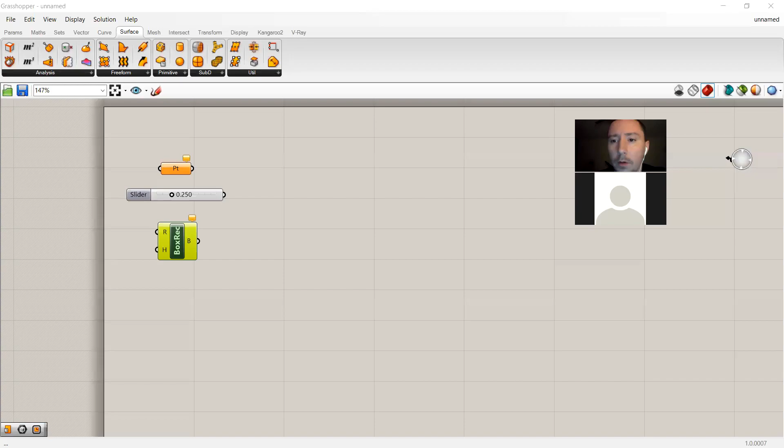Different nodes, so these are called nodes, right? This node in reality is a tiny block of code that's hidden behind a visual interface that does something.

When you first load nodes that require some level of input, they will pop up in an orangey color with a little notice above it, basically saying, hey, this isn't collecting any data right now, meaning it's not working. It's a warning. It requires a bit of data in order to function.

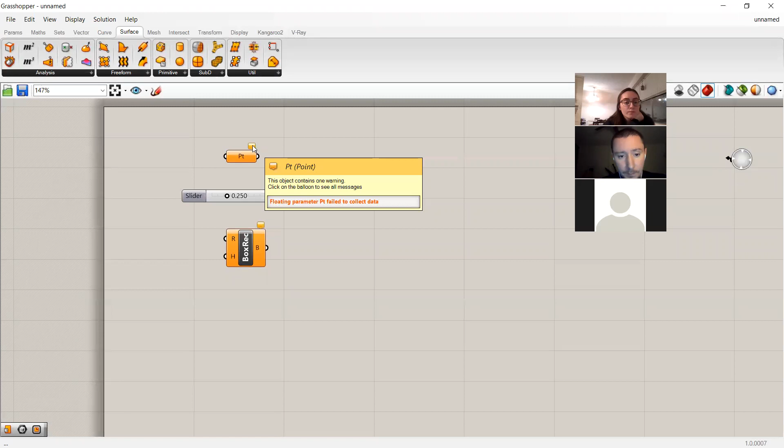If this is red, that means you have an input, but it is not functioning properly. Something is broken, and if you hover over the little message box, it'll usually give you a brief explanation of what's going wrong in your definition.

So these are called nodes. This is kind of a geometry node, right? So this is a point. There's all kinds of them - there's curves, there's planes, there's arcs.

So these are all geometry parameters. This kind of node can have an input and an output. It can also not - we'll see here shortly - it can also just have an output, meaning that you don't need to input something in here. There's other ways that you can get information into this node.

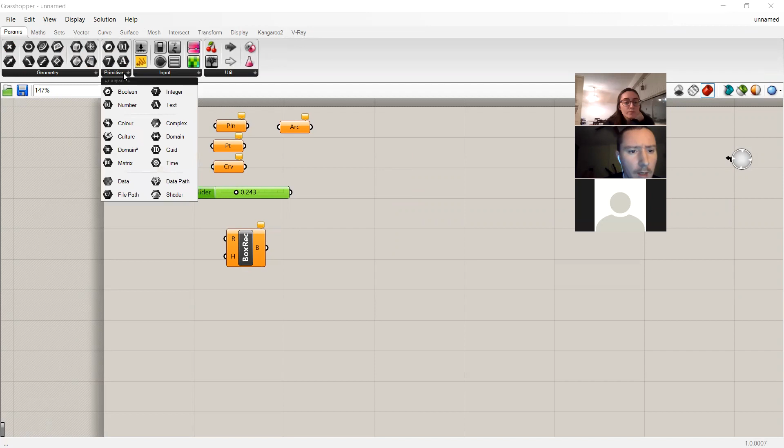This here is called a slider - it's a number slider. It comes from... actually, let me find where the number slider is - oh, there it is, from the input. So these are different input nodes, and some of these over here are also input nodes. Like this is technically an input node.

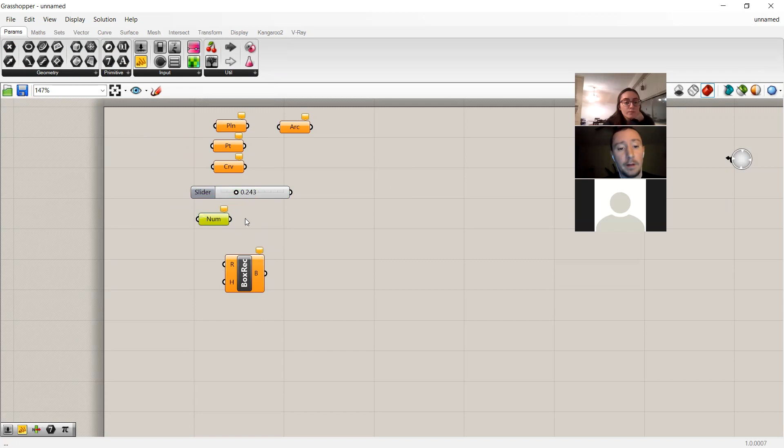These basically force data into something, right? It takes a number and puts it in, gets the number. Or this one is generating a number based on a slider that I slide back and forth.

Some of these nodes you can double click inside of, like the number slider, which is probably the most common input node that you'll use. You can double click inside of them and change how the numbers function.

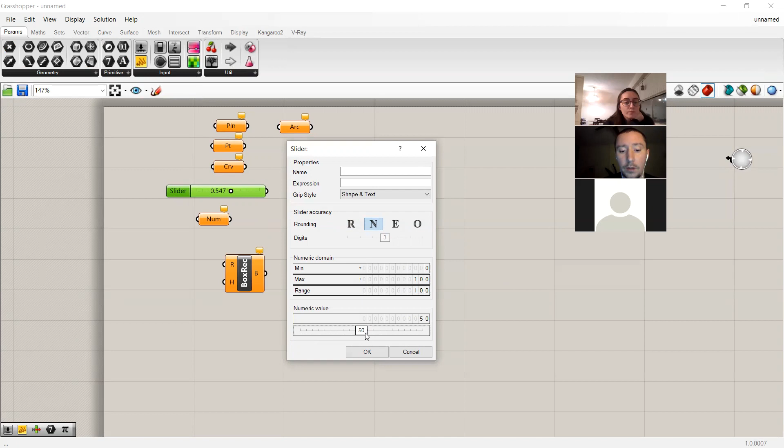For this slider right now, it is just a floating point number. I can change it to integers. So I can say I want it to just be integers, and the max range is 100. If I wanted to, I could put a minimum range, and I could also set its default value to 50. I hit OK, and now you'll see it's automatically 50.

If I hover over it, you'll see it describes what's happening inside of it - it's saying that its current value is 50, its upper limit's 100. It's currently set to an integer function, so it'll only go 1, 2, 3, 4, 5, 6, 7, all the way up to 100 and no further.

These nodes, for example I told you we'd talk about the panels - this is something you might use. This just basically allows you to see what's happening. There's this bit of code happening inside of these nodes, and this panel doesn't actually do anything other than display the information.

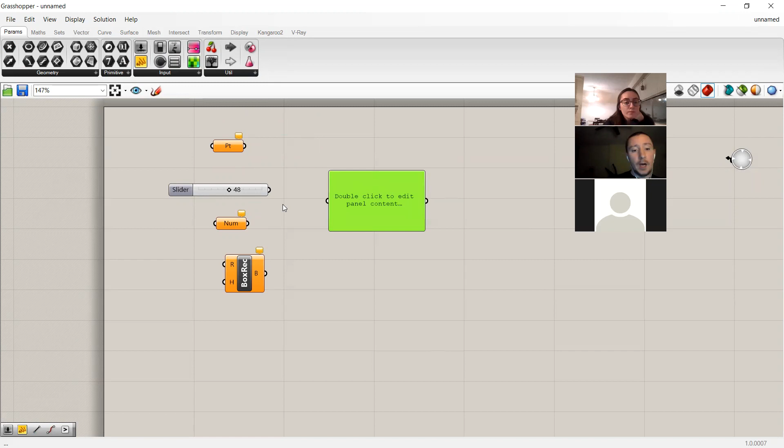If I was to plug this into here, you would see, oh, I have the number 48 popping out of this. If I change this to 21, it says number 21 is coming out. It's not very useful for a number slider, but for a more complicated node, it could be very useful to see what's coming out of it, so you know what kind of information you're pulling from it.

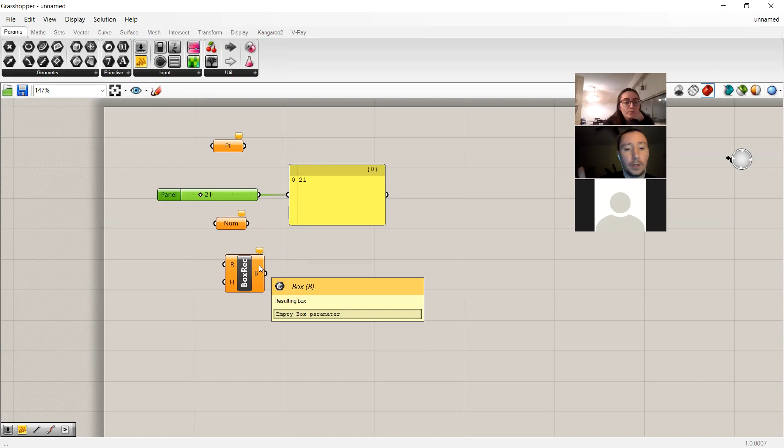So they're useful just to see, and if I were to pull something out of this side, it's just passing through, right? So this number 21 is going in here, it's displaying what it is, and it passes out the other side still the number 21 - nothing's changed about it.

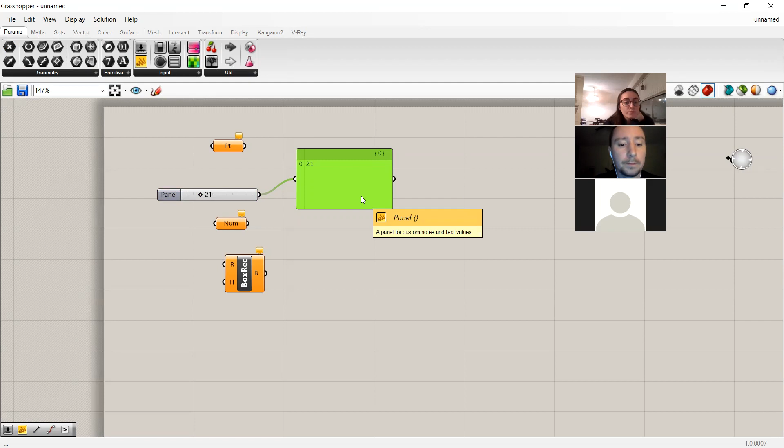This is literally just a display, nothing more.

This is also an input node, but it looks different than the panel. You can see if I hover over it right now, it has an error. If I hover, it says empty number parameter. And if I hover over this, it's saying I haven't collected any data.

So I could plug this node in here. The error goes away. And if I add a new one, I guess we should go over how to plug things in. If you hover over the little nub at the end, you'll see the arrow changes to kind of a wire.

If I click, hold, and just click once, one click, nothing happens. You have to click and hold, and then you can drag this around and plug it in somewhere.

So if I plug that into there, you'll see that that's just the number 21. If I change both of them, you'll see they're both changing the same, because this number is just passing into here. It's a number and it's popping out the other side.

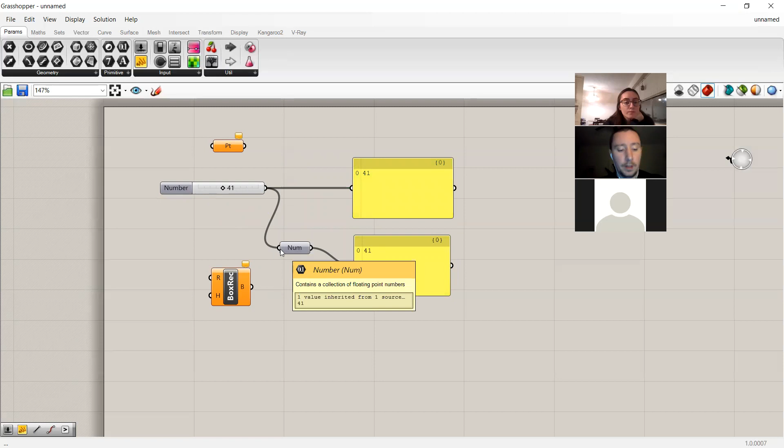But another thing I can do is unplug something, if I don't want this to plug in anymore. There's two ways you can do that. You can right click and disconnect, and I can pick which wire. So I could say, oh, I want to disconnect number 1. I can click that and disconnect.

Or I can hold down Control, and you'll see the cursor changes to a red arrow with a minus sign. I can unplug it from there by holding Control and going back to that node. Right now, as you can see, no data is being collected.

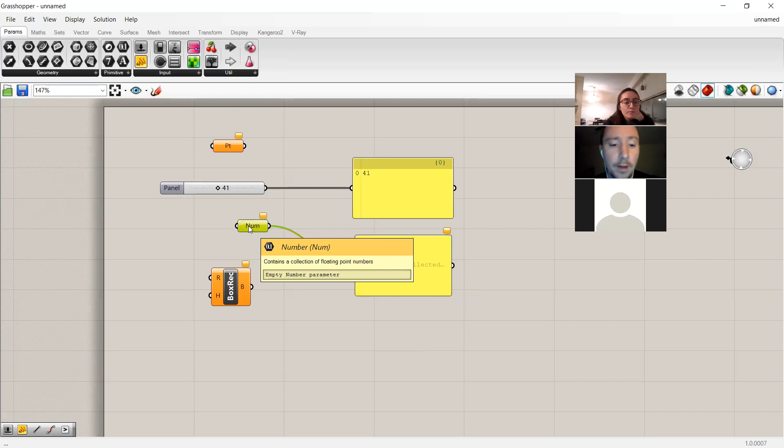But another thing I can do to push a number into this is right click and add, set the number. So I can say I want this number to be 38, and commit changes. You'll see that now I have the number 38 popping up right here.

So this is just the number 38, nothing more, nothing less.

I can also, if I wanted to plug more than one thing in, so if I was to plug this in here, it unplugs the slider. It automatically unplugs. But if I wanted to plug more than one thing into this panel, I can hold down shift, and you'll see that changes to a green arrow with a plus sign, and I can plug it in that way.

And now you'll see this panel is showing your first example of a list. So I have a list of two numbers, 41 and 38.

Lists are an important bit of information you'll probably need to rethink through many times. Lists in Grasshopper always start at 0. So the first item in a list is in the 0 position. If a list has 2 numbers in it, it's 0 and 1. If it has 10 numbers in it, it goes from 0 to 9.

So if you typed in, I want to see the 10th item in this list, it would get nothing. You would get an error because there's not a number 10. The 10th item in the list is actually in the 9 position.

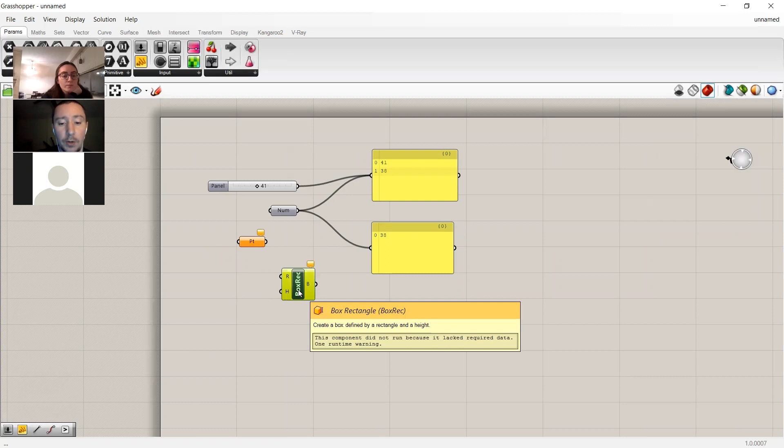It requires, so it's going to do something. It's going to process information and create something. So for example, this one is to create a box, a rectangular box.

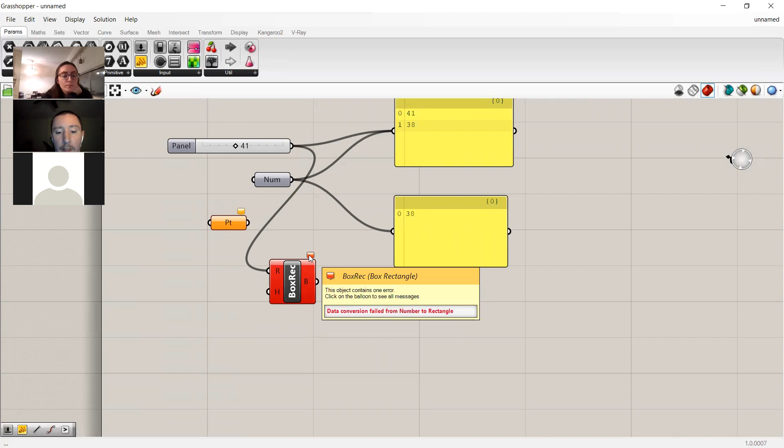And if I were to plug, I wonder if I can generate an error. So you can see here how I plugged something into that box. I plugged this number slider into the box, and it turned red and looks all menacing. If I hover over this, it says data conversion failed. Something's wrong with the data coming into here.

Does anybody have an idea of why this is? Speak up as to why that error is occurring.

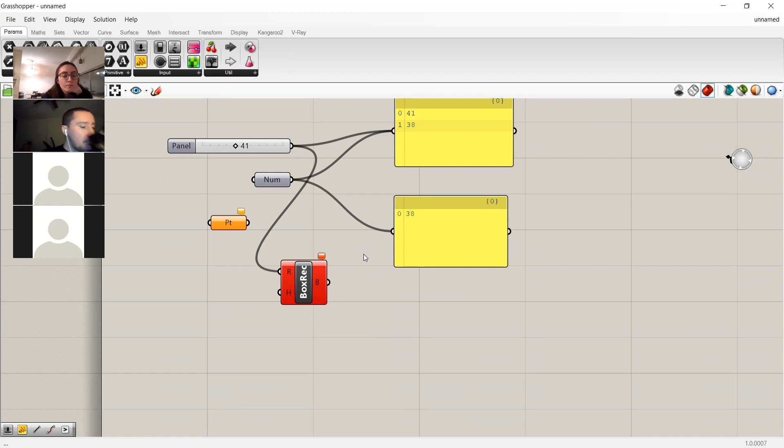It doesn't know the units, maybe. It needs a number box, it looked like it said. It said something about failed with number box.

Go ahead, when you hovered over the smaller red box, I think... Dane, is there any way you could change the display of the nodes to see what R stands for?

I don't believe so, I don't actually 100% know for sure. But if I hover over the R or the H, it'll give you a basic description of what that thing is. So if I hover over that R, it's basically saying the R means I need a rectangle.

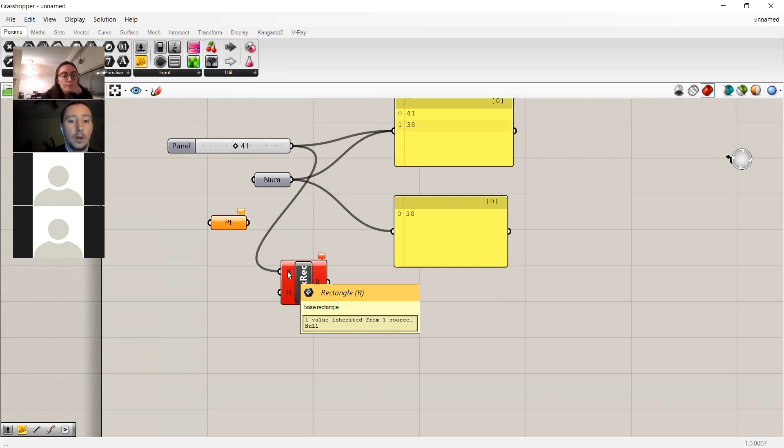So let's unplug this for a second. Let's go back to Rhino for a second here. So if I were to create a box, a cube, or extruded rectangle in Rhino, what would I need to do?

I would come over to my solid tool for a rectangle, and the first thing it says is, oh, I need the first corner of the base. So you can actually think through how you might build something in Grasshopper by trying to build one of those things in Rhino. So if I want to create my box, I'm going to click my first corner. I got my first corner.

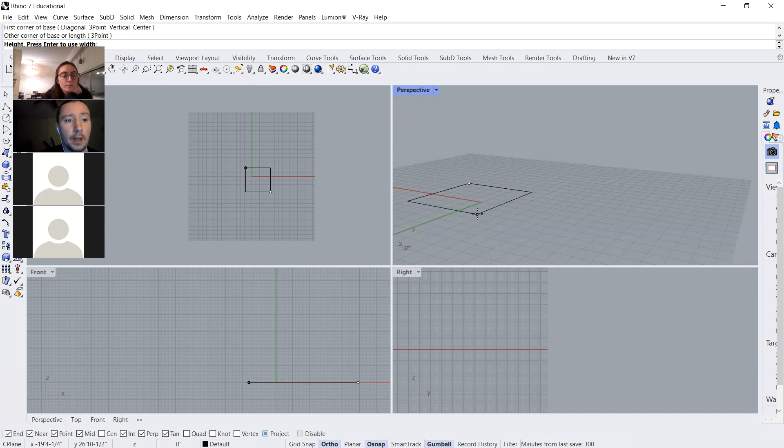Now it needs the other corner. Okay, I'm going to click that. And now it needs a height. So then I extrude it to the height, right? So I created a rectangle by clicking the first corner and the second corner, and then I extruded it up. So that's how I create it by hand in Rhino.

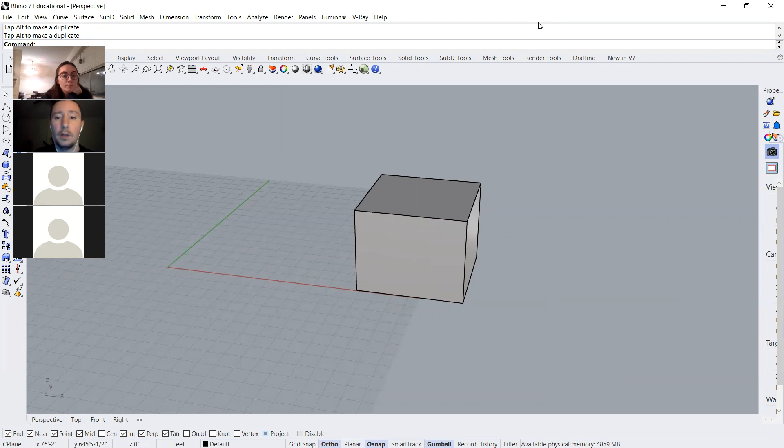So if I wanted to do the same thing, build the same kind of box, let's actually make this a box that's a little easier. I want to make it 50 feet by 50 feet. Oops, I don't want a box... I want a box. So I'm going to go 50 feet that way, 50 feet this way, and 50 feet up. So that's a 50 by 50 by 50 box cube.

So if I wanted to do that same thing but in Grasshopper, let me just delete this, we'll go through it step by step. I'll delete all this. I would go to my surface tab, and I would go to my primitive shapes.

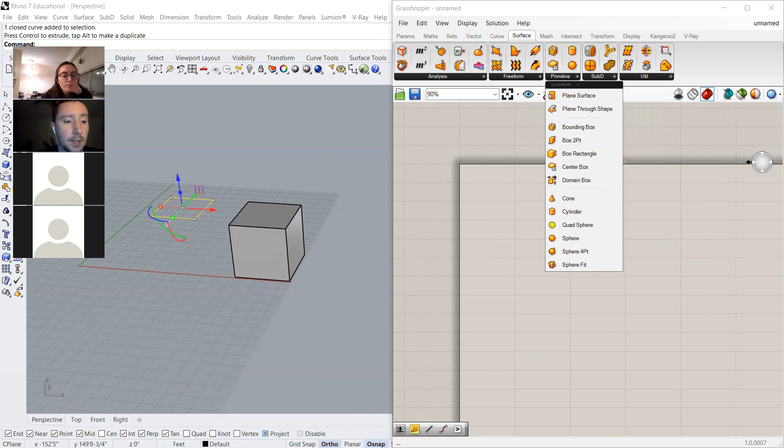Okay, what kind of box? How do I want to make this box? Do I want to make the box by a rectangle, or do I want to make it by defining 2 points? Because if you click over here, isn't there a box by corner? There's a way to create a box by 2 points.

Yeah, right here, by selecting 2 points and creating a box that way. So there's different ways to create a box in Rhino, but we'll create it the same way that we created this one. Come to my primitives, I'll say okay, I want to make a box. Sometimes it helps, especially in the beginning when trying to create simple shapes, to start with what you think is the last thing you need to do, the last step.

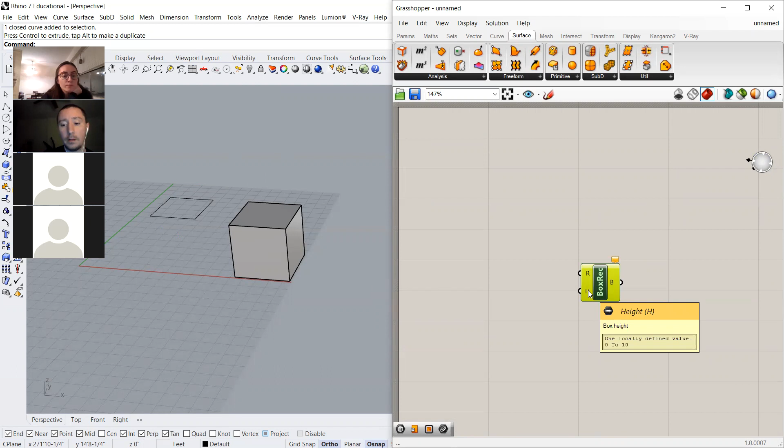The last step is the box. So I want to create this box, but I need inputs, right? It's a component node, so I need to figure out what those inputs are. The inputs are similar to the ones that we did over here. If I hover over the R, it says I need a base rectangle. If I hover over the H, it says I need a height, a box height. So how do I get those?

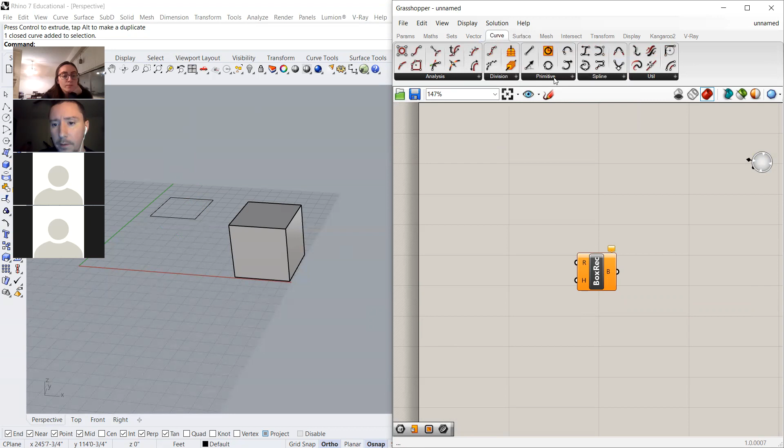Does anybody have an idea of some of the options I could do to get the rectangle? Two main ways: I can build a rectangle inside of Rhino already that I use to plug in here, or I could build the rectangle inside of Grasshopper first. So if I go to curve and go to primitive, down here you'll see there's a rectangle option. I want to create a rectangle, and if I click here, I get all these different options.

Some of these nodes have to have something plugged in, but not all of them necessarily need to be plugged in. So you can see here I have 4 options: what's the base plane of my rectangle, what's the X dimension, what's the Y dimension, and what's the radius if we wanted to fillet the corners.

If I hover over this, it says one locally defined value, and underneath that it says World XY, meaning it's defaulting to XY. You can even see over here that I have the plane, showing me what plane that rectangle is going to be on. That red doesn't actually exist in Rhino, it only exists as a kind of preview of what we're doing.

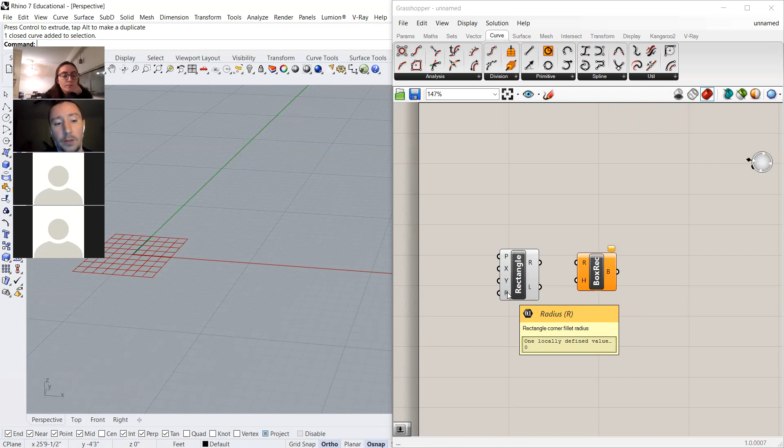If I hover over this, it has a locally defined value, X's -1 to 1, Y's -2 to 2, and the radius value is defined as 0. So right now, if I were to plug this in, with nothing plugged into this rectangle, it has created an extruded shape. If I hover over this H, you'll see it's locally defined, one locally defined value is 0 to 10. So with no information plugged in, all of these default values apply: it's on the XY plane.

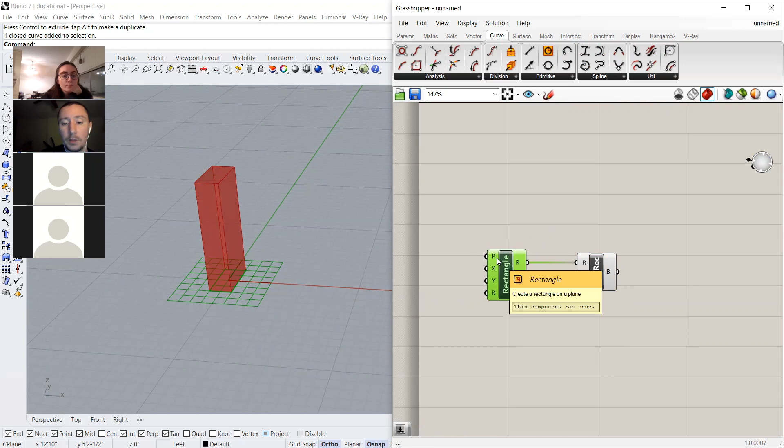The X dimension goes from -1 to 1, the Y dimension goes from -2 to 2, so you can see it's longer in the Y direction than the X direction. It currently doesn't have any filleted radius. It's plugging into here, and its default value is 10, so it's extruding up 10. But we probably don't want that kind of rectangle - if you do, then you lucked out.

So we might start to plug in some of these dimensions. Does anybody have an idea of what we might need to plug in to make it a different size? Would you use a slider? Slider's definitely an option. So we can go to parameters, to input, and put in a number slider. This number slider only goes to 1, and it's a floating number value.

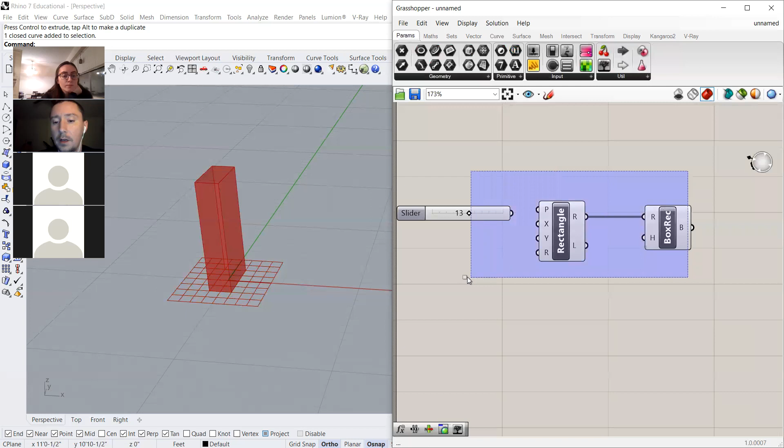If I double click in here, I want to change this to just an integer for easiness. I'm going to say 25 is the max, and we'll put it somewhere here - 13 is the default. So you see we have a slider, and as Michael suggested, if we plug that into the X, you'll see the X is now changed - it's starting at 0 and going over to 13.

I can also plug this into multiple wire connectors. So let's say I wanted to make a true blue square, and didn't want it to be a rectangle - I could also plug the 13 into the Y dimension, and you'll see it is now extruding that square to be 13 and 13.

If you really wanted to go buck wild, you could even plug this 13, since I want it to be a cube, into the height parameter. And now I have a 13 by 13 cube.

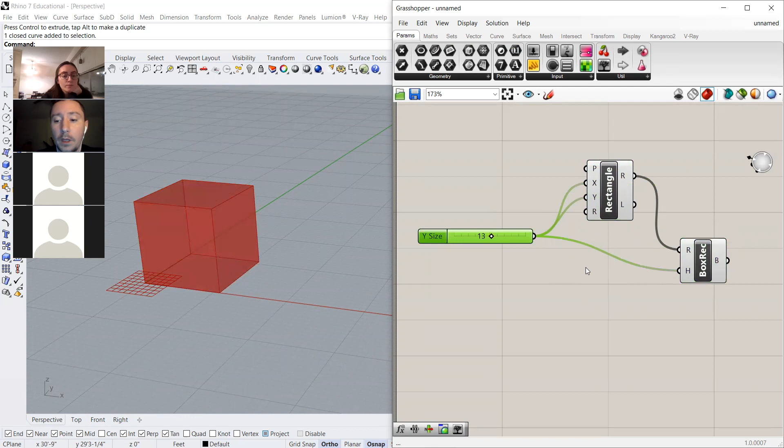I can now start to change this and say I want this to grow. So we made the other one 50 - let's make the max 100. And then I can scale this all the way up to 50. So now I have a cube that is 50 by 50, just like this guy is.

The difference here is that this doesn't actually exist - oh, that exists. Let me move this over here. So this doesn't actually exist in Rhino right now, this is just a representation of what could exist in Rhino. If I hover over these, I can select them and do things. If I hover over this preview, I can't do anything with it, because that's all it is, a preview.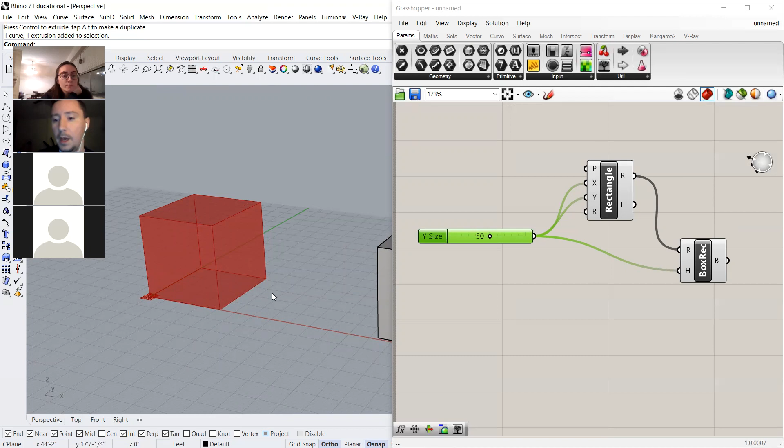Does anybody know how to actually get it into Rhino? So we have a cube. You have to bake them or something, right? Yeah, bake it. So if I hover over this last bit here and right click on this node, I can bake this into Rhino.

So if I click the bake button, it's going to ask me what layer do you want to put it on. I'll just pick layer 3 and hit done, and you'll see now I have an actual three-dimensional object that is the cube on layer 3.

You'll notice that if I change the size of this, nothing happens to the baked object. So if I wanted to change it to this size, I would need to rebake it in, and then I'd have my smaller cube, and I could go on and on and on.

This is way more steps than you need to make a cube. You'd probably just make a cube in Rhino, but this gives you the basic idea of how to start modeling things. Another way to get information in here, which starts to get more at the parametric side of things, is...

Hey, dog's going a little nuts.

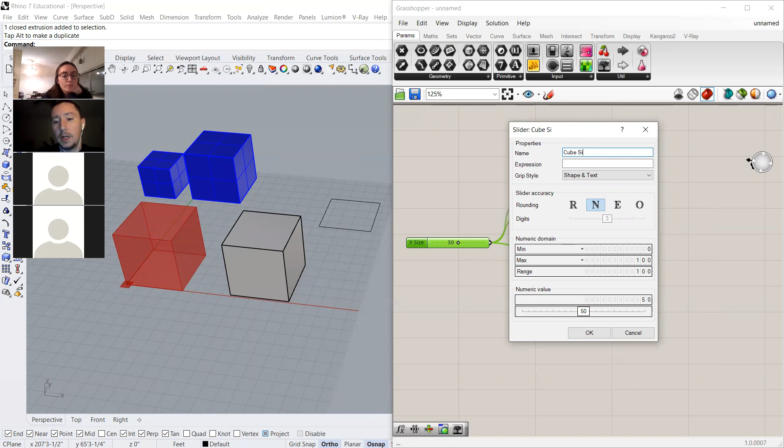Also, I should note, if you double click on these nodes, you can rename them. So you can name this 'cube size' and hit OK, and you'll see it now changes the name here, so you can know what things are doing.

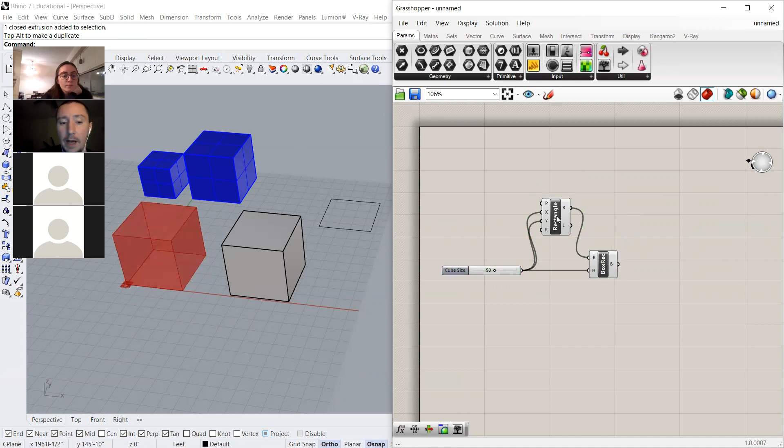Another easy thing to do to organize these: if you hover over a bunch of things and select a few, you'll see them highlight as green. Basically anything I select in Grasshopper that's being previewed in Rhino will highlight as green.

So if I select the box, that highlights. The cube size isn't anything, but sometimes it's good to see where this is showing up over here, so you have a relationship between the two.

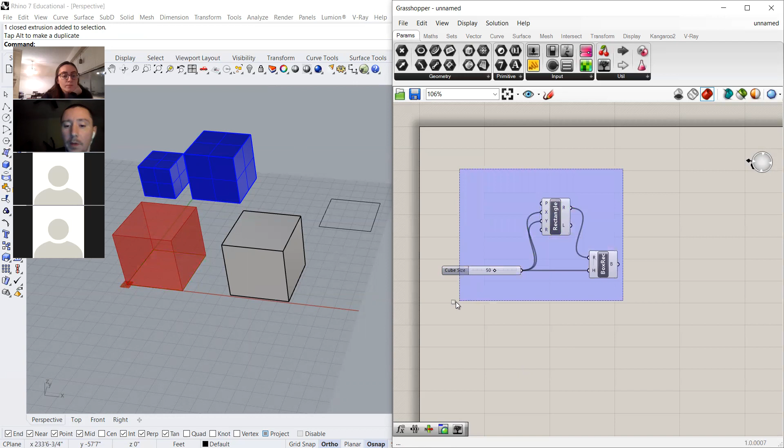If I hover over all of this, there are some align tools you can start to use that get a little wonky when you can accidentally overlay things on top of each other.

Another organization technique is right-clicking and Control-G, which basically makes a group so I can easily move these things around.

And if I wanted to note what this group did, I can use a command called scribble, and I could put a note here that says 'cube creation'.

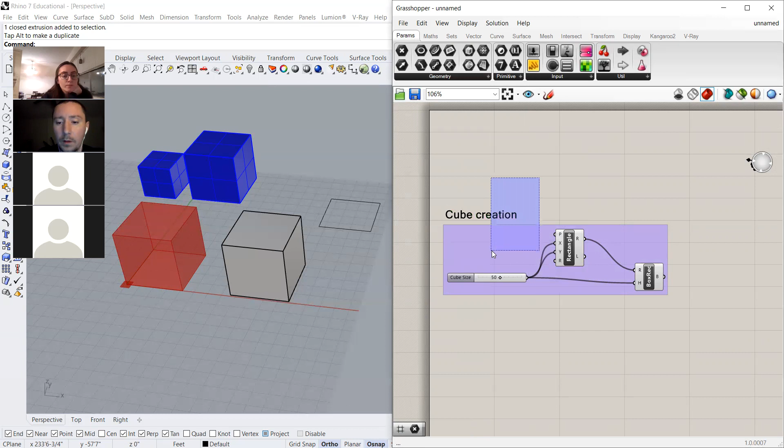Can you group all of these together? Add to group. Then you can group the text inside there, and then I know that's where my cube is getting created.

It might sound ridiculous to do that right now, but trust me, when your definitions get very large, it'll be hard to find things sometimes, and this kind of organization can help.

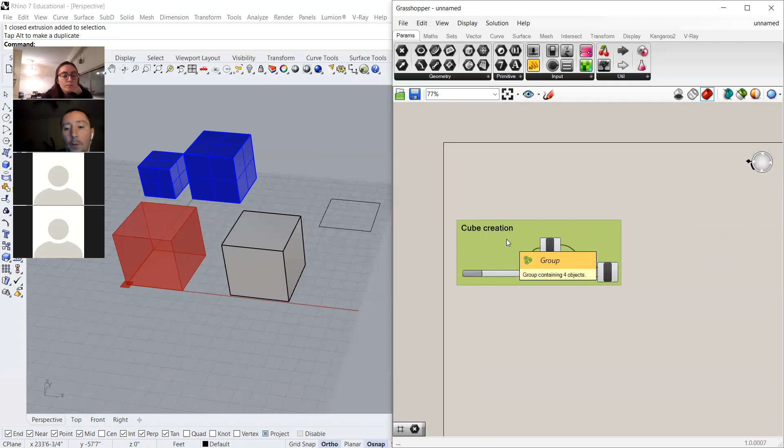I don't know that I've told you what a definition is, but this right here would be a definition - a group of nodes that do a thing. You're creating a definition of how to build this cube. The definition is these three things, and it's coming over into Rhino like that.

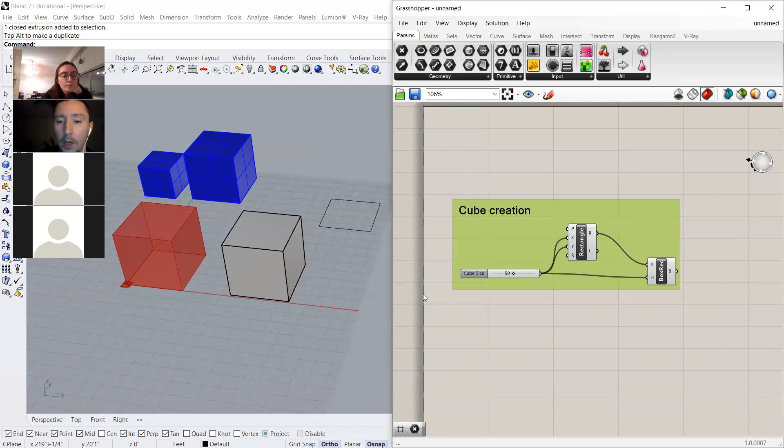So another way to potentially draw a cube here that'd actually be a little more, quote unquote, parametric - I'm going to delete that input for a second, and delete that as well. I can do this with just two nodes.

So if I come up to geometry, there should be... where are you? I guess I could do the curve.

So I can say, hey, I want to grab a curve that I've already drawn in Rhino, right? So let's say I wanted to create a cube out of that square that we drew.

If I right click on here, you'll see there's a bunch of different options. We'll get into some of them later, but I can set curves or multiple curves. So if I click set one curve, it's going to pop me over to Rhino.

Grasshopper kind of disappears for a second. You'll see up here it says curve or edge to reference, so it's wanting you to select something. So if I select that, I've now popped back over, and you'll see that when I select this, that highlights green.

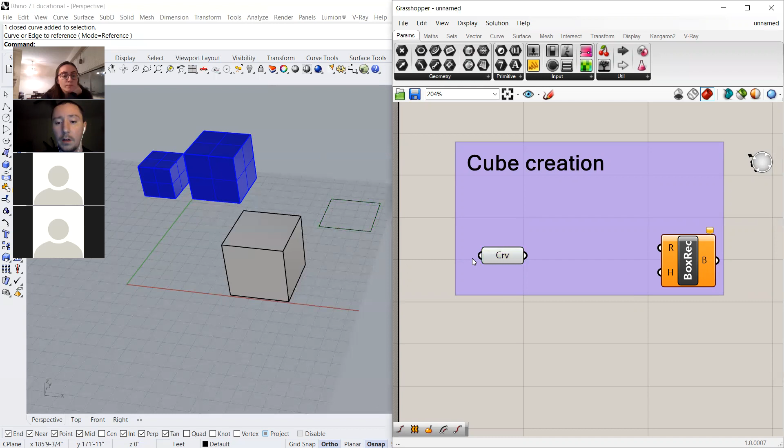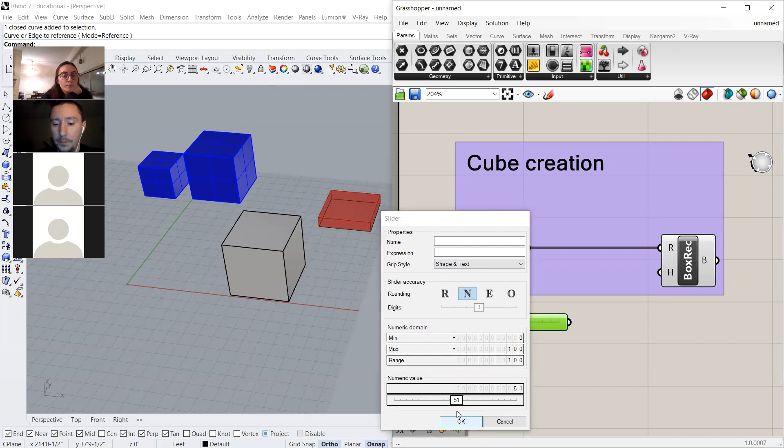I now have a rectangle selected that I've drawn in Rhino. And if I plug this into there, you'll see it's starting to build a cube out of that curve. So I'll just add in a number slider here. I probably shouldn't have deleted the one before. We'll make this a... I'll plug this into here, like so. I now have a cube that is based off of a curve in Rhino.

And the fun part about this potentially, this is why parametric tools are very powerful, is let's say I created a bunch of rectangles. I came back in here. I can select multiple curves, right?

So if I select multiple curves and I grab these guys right here. Oops, let me delete these. I'm going to select multiple curves and grab all of these. I right click as done. I now have a bunch of different cubes that all function the same and do the same, functioning off of one, a few nodes in Grasshopper.

And let's say I moved one of these in Rhino, the cubes move with them, right? So, these are all the same height, so it may not be that useful to do for this, but let's say I had all of these generating different heights for some other reason. There's no reason why this number, this is just data, right?

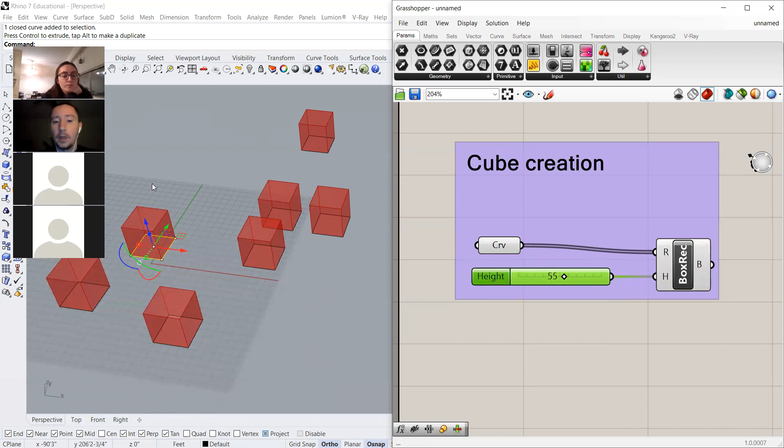There's no reason why I can't go grab sun or wind data from somewhere and pump it into this number and say, oh, I want all the cubes to be relative to the miles per hour of wind on different times of the year or something. And then they all are shifting at different times or different heights. So this is just a kind of value that we're plugging in, but any number or any set of numbers can kind of come into that.

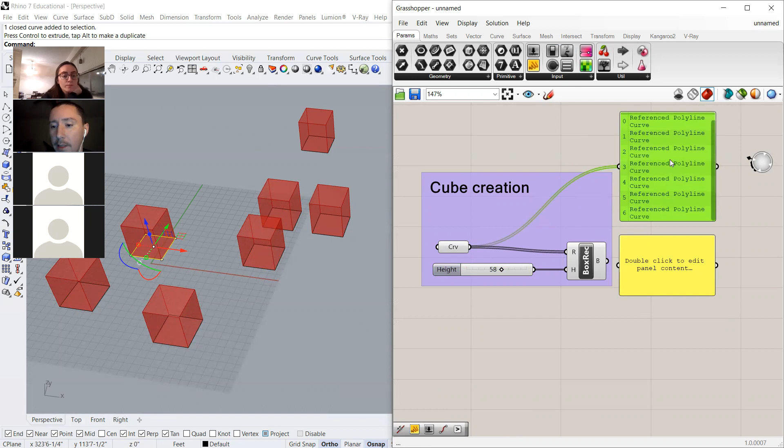Into this box. And if I add some panels, you can see what's kind of happening behind the scenes. So if I plug in this curve, you'll see that inside of this list, I have a list of different polylines. So these are all the things I selected. And if I pump this here, you'll see these are the boxes that are popped out that are coming out of this.

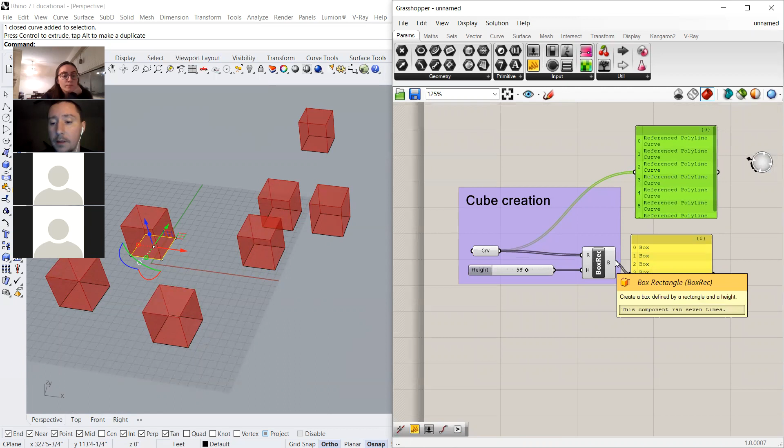So you can kind of see, there might be a time in the future where like, oh, I just need to grab the first in this list, or I need to grab the third item, or you need to parse this list out in different ways. You can see what data is coming out of this box or out of this node. So the panels can be useful for that.

And then if I plug on past this, you can still use that data for other things. And if I wanted to, I could right click this. I could bake all of these things, bake all of these boxes in here. And now I get a bunch of cubes. You can see that they all move because I'm selecting the curves as well. But if I just select that, I can see that I have all these different cubes popping out.

Any questions related to kind of how these basic things are being created?

And there's, you could do, that's like kind of just basically creating basic geometry. Trying to think of something we could do if we wanted to create a quick... I think, rectangle. I'm trying to think of a way to kind of quickly make this into something a little more interesting.

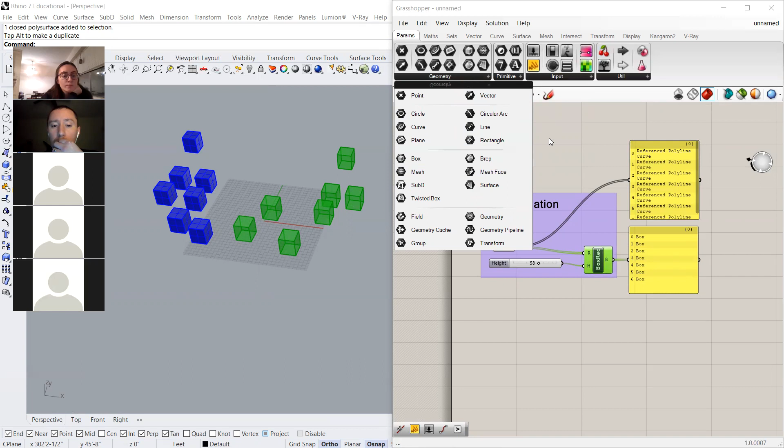I have a question. Yes. So the red blocks on the right, those aren't real blocks, right? They're not real. Right. So when the blue blocks were on top of those and you selected all of them, is there a way to just select the real blocks and move those separate from the others?

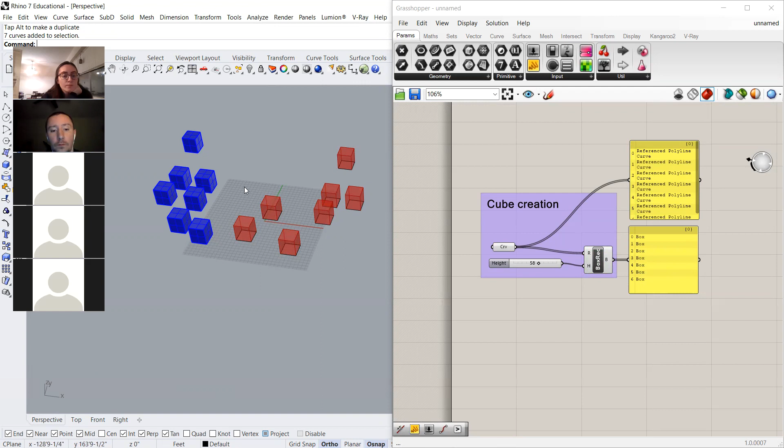Yeah. So what I was doing before, these red blocks, they're being created by taking that curve and pumping it into this node, right? We're taking the curve, putting it in here, and telling how far to extrude the box. When I selected them all before, I was also selecting the curve. So Grasshopper is still keeping track of that curve, like where is it? What's going on with it? So it moves the box, the preview, wherever that curve is.

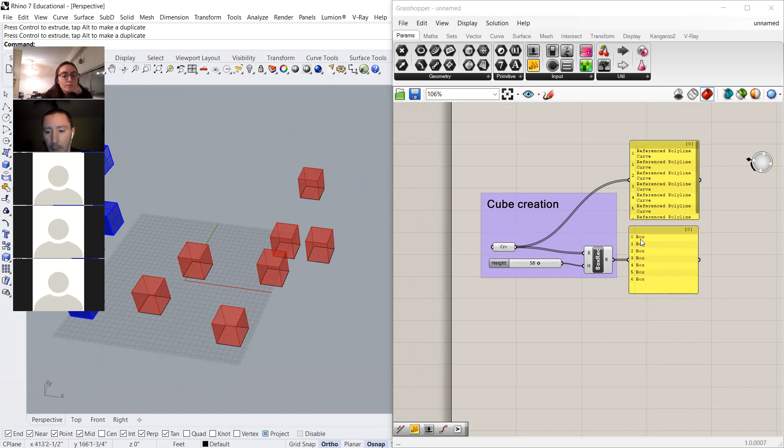So if I wanted to, I'd bake this in again. I pick layer 3, I hit OK. I minimize this for a second, and I come back over to Grasshopper, and I click on layer 3, and I hide everything else.

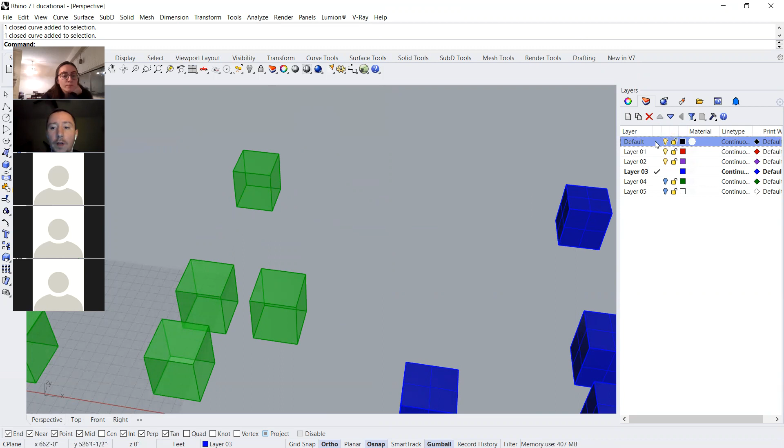I should now be able to grab all of these and move them, and the green previews will stay there because I'm not moving the... where are they? Okay, so I'm not moving this. I was turning off the layer that was on, so I'm not moving the curve that's creating the box. Does that answer your question, Laura Beth? Yeah, thank you.

So that's how it works. If I was to close out of Grasshopper, those green blocks would go away, they would disappear, they wouldn't be part of it. But if I saved it and reopened it, as long as those curves still existed, it would still grab them the way I'm currently selecting them.

If I deleted any of them, or deleted them and redrew them, the ones I deleted or redrew in some way would disappear also. So you kind of need to... that's why it's sometimes better to create the rectangle in here.

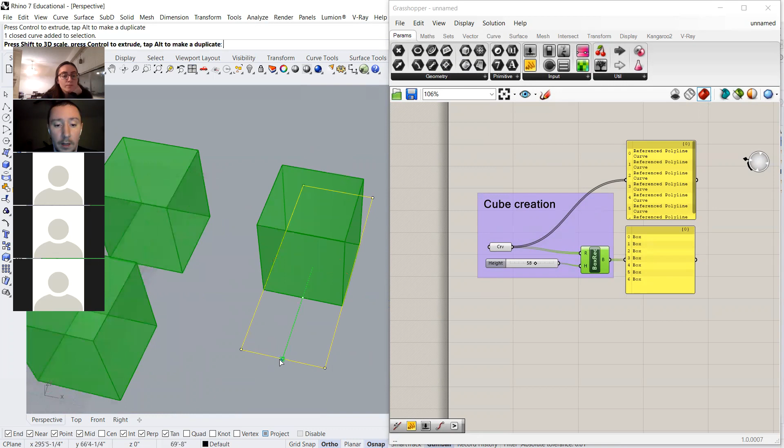Unless, another thing we could do is I can stretch this, so it's just tracking the shape of that. So I can't do that - you see here, when I make it not a rectangle, it doesn't make it not a rectangle. I'm not using the right node because this is only creating a rectangle, so I can't make a weird shape. I have to use an extrude command to get that kind of shape.

But if I move it up, it tracks wherever that curve goes and keeps generating that rectangle off of it. So let's see, what was I trying to do? Let me see if I can...

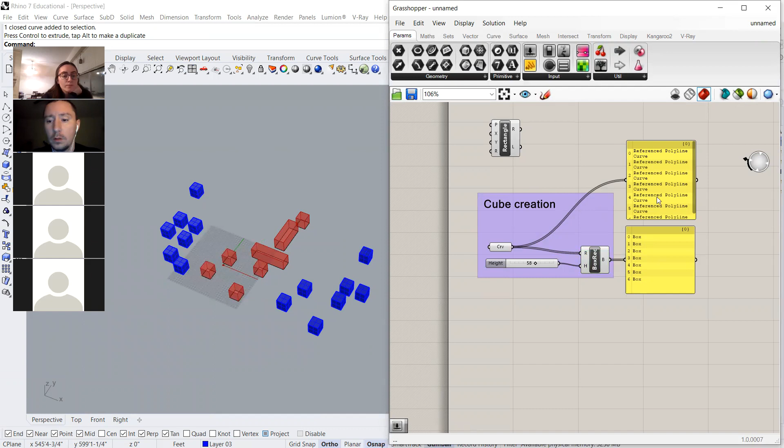So let's try a different thing real fast to kind of show - we'll get a little deeper into this next class, but this might be the last thing to show for tonight.

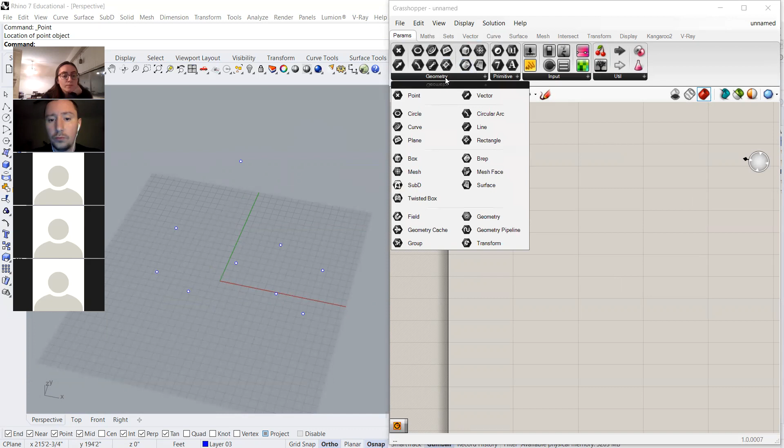Let's say I had a bunch of points in here, and I'll put one out here. And let's say I wanted to do - has anybody heard the term attractor point before? In relation to... see, I want to generate.

So I want to basically start to create something that's actually parametric, reacting to something else. So I'm going to create circles - I want to grab a bunch of points and create a circle at each one of these points, minus that one, right? So here's the circle command, and you'll see it's asking for a base plane - that's not what I want. Radius - not what I want either. Maybe I don't need a circle.

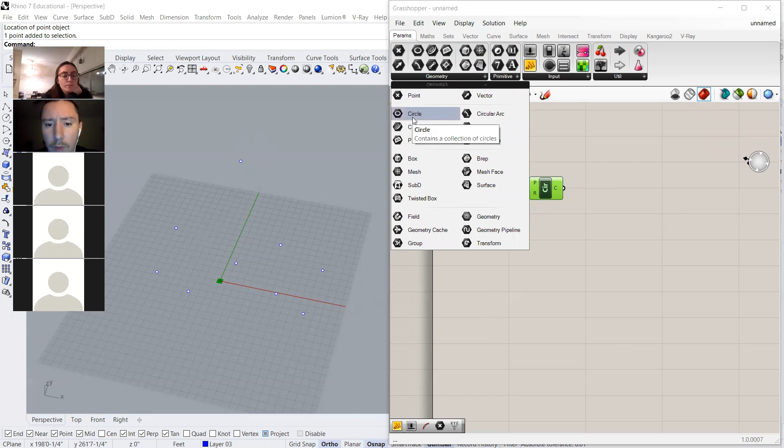Maybe I can - what I was saying earlier was if you go up to display and click display or draw full names, it makes it so you don't have to hover. Oh okay, yeah, I didn't know that, thank you Nick, appreciate that. You might do this and then depending on your nodes, they might get a little crazy, but that's good information, I didn't know you could do that.

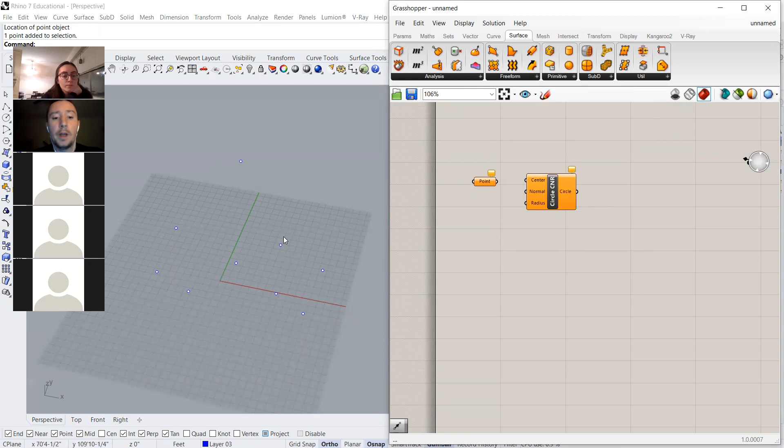So what am I trying to do here? I want to... okay, that's what I want. So I want to create a circle where the center point is all of these points. So I had to find the right node, which is circle created by center, normal, and radius.

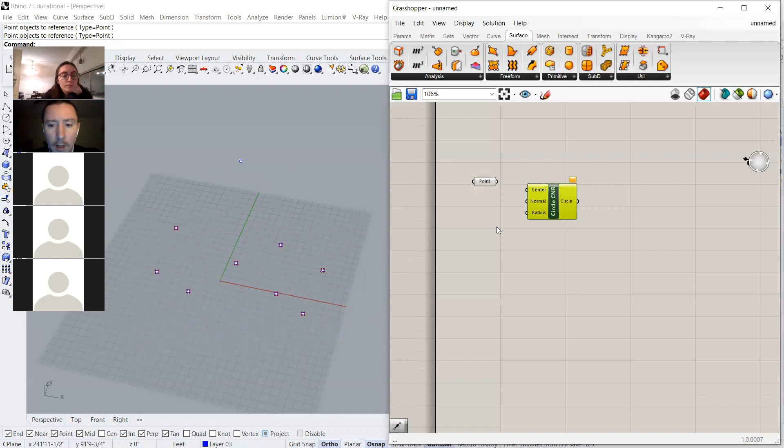So I'm going to select all these points, go to set multiple points, select all of these, come back over here, and pick my center. I'm going to put in a number slider - oops, what I wanted was a number, I'm going to do a number slider like so.

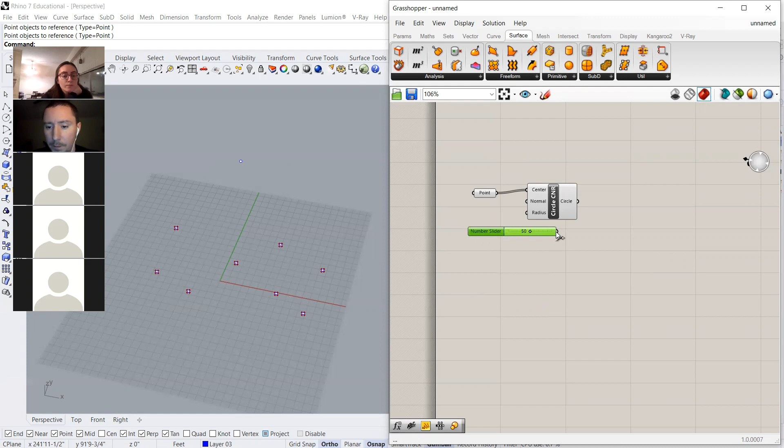Make it 100 - I'm just kind of riffing here so I might screw it up, we'll see what happens. Make this not zero. Okay, so I now have a circle generated around all of those points, right?

And then let's say I wanted to extrude - whoops - a cylinder. So I guess I could extrude, so I can extrude all of these circles.

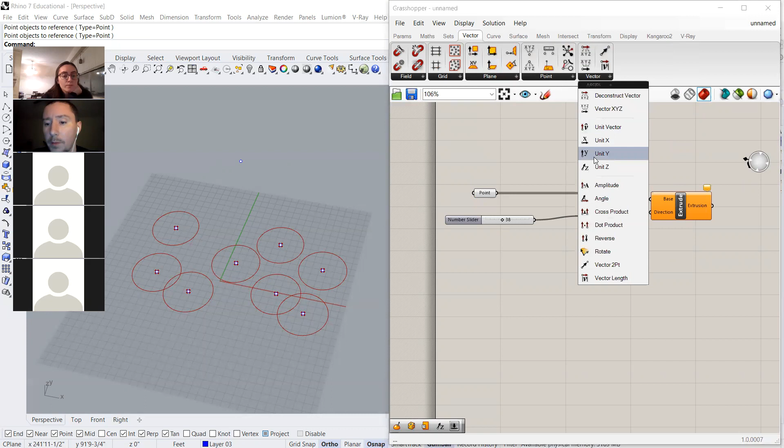So this needs a vector - we talked about vector before, so I'm going to go to my vector tool. I need to tell it which direction to go, so I want it to go upwards, in the Z direction. I'm going to pop that in there - you'll see that I have a tiny little extrusion. That's not really what I want though.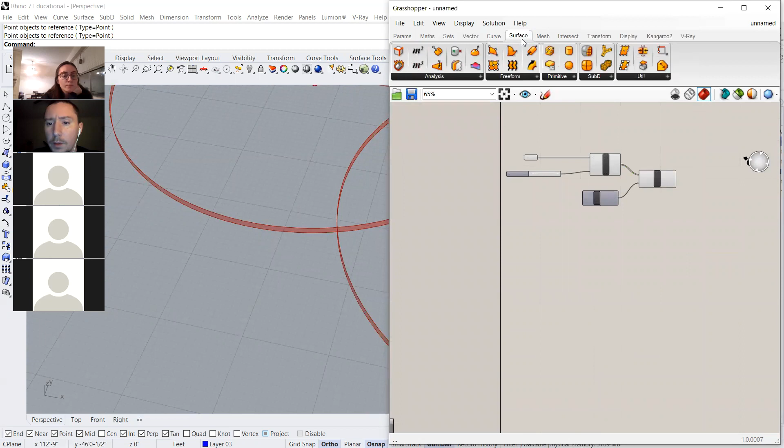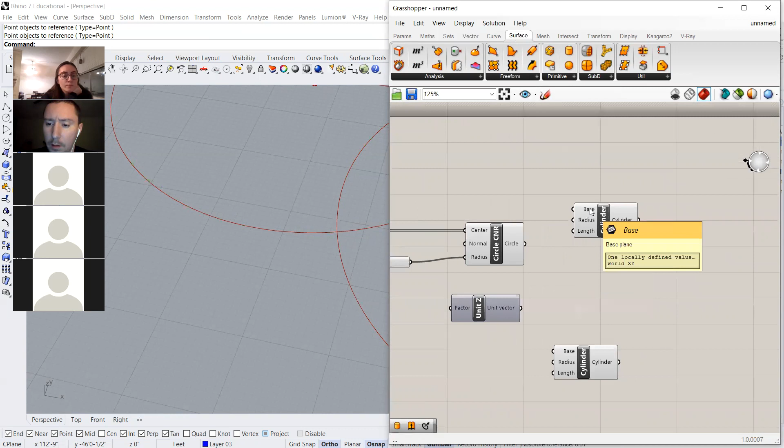Isn't going as smoothly as I thought it was going to go. What I'm looking for here... Y, radius. I swear there was a different cylinder. Base plane. Oh wait, did I? I'm gonna delete. That's not it. All right, well, let me think a better way to do this. Sorry guys, I had an idea. Now I'm like stuck on it.

Maybe do this. Offset curve. Let's try a different version of this. We'll keep the points, we'll draw a line.

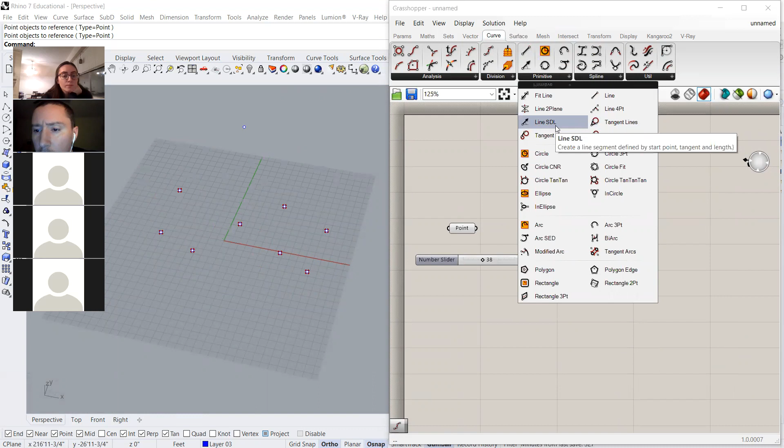So let's go to curve, we'll do a line from the start point and direction, right? So this is my start point, this is my length, so now I'm drawing lines. Its direction is upwards, in the Z direction. If I wanted to change the direction, I could plug something in there. But I now have lines that are going up from that start point, right?

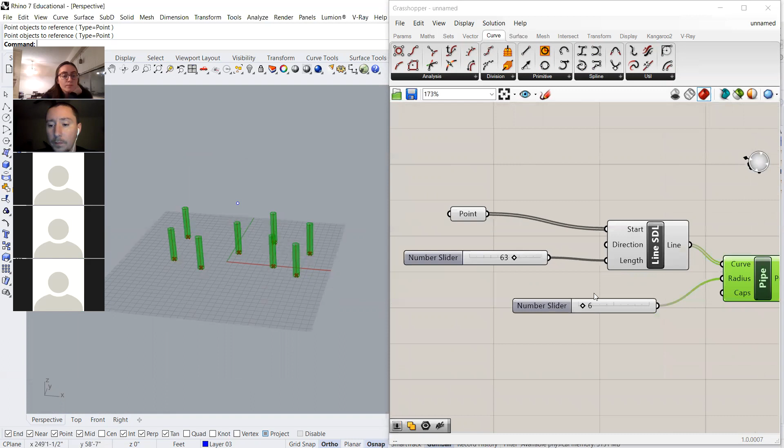So then I could say, maybe I want to create a pipe around that line. So this is the pipe command. I can put a curve in here, so that's my curve. And then let's say I have a radius, I'm just going to copy that number slider and plug in a radius here. It gets a little crazy, so let's shrink that down a little. So now I have these pipes extruding up, 63, you know, the number 63.

But let's say I didn't want them to just be a solid number. Let's say I wanted them to be based on where this point is. So I could do, this is what's called an attractor point. I'm going to delete that for a second. I'm going to look for a command called distance, so I just typed in distance there. And I basically have a thing that will say, what's the distance between 2 points?

So I can pop in point B, which is all of my other points. And then I can grab, let me select the point from here, push it down. I'm going to set my other point for this one and plug it into point A. So if I put a panel here, I should have a series of distances, and that's the distance from this point to all of these other points. And now these are just numbers, right? So I can just take that number and plug it into the length.

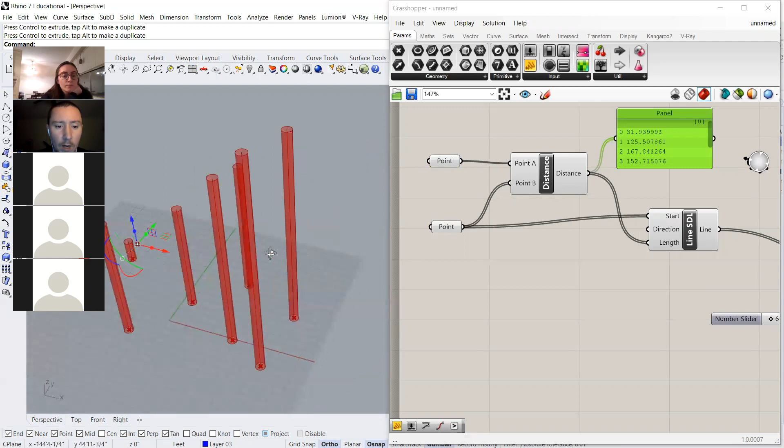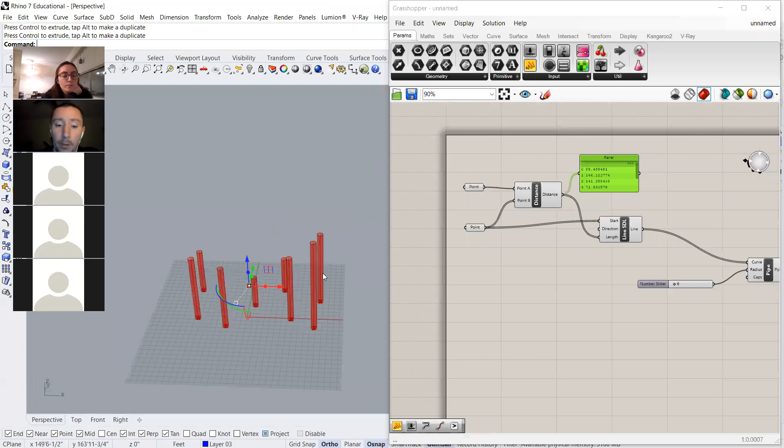And now you'll kind of see that all of these are different heights. And if I was to move this around, they all start to change based on where that point is. So the closer it is, the smaller the extrusion gets, the farther away it is, the bigger the extrusion gets. We'll get a little deeper into this next class, but this is kind of the start of having an input, which is this point and its distance. I'm processing it by figuring out its distance from all the other points, and then my output is extruding a pipe around those different options.

And if I wanted to, I could bake that in like that. I could select all those, and I have a series of pipes that are extruded at different heights based on the distance from this point. So this is the super basic version of what you might start to do. Your versions will get more and more complicated, but this is kind of the beginnings of parametric. You're processing data relative to these things.

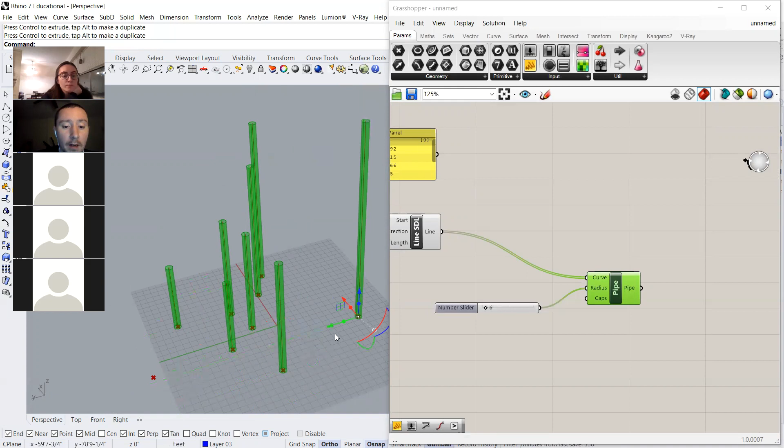And if I came in here and I said, oh, I don't like where that one is falling or this point is falling, I can start to manipulate these things, and the information still stays. It changes based on how far away it is from that and how close it is. But that information is being reinterpreted every time I move one of these things.

So I have a question about the panel - you have all of the numbers listed out, is there a way to see which number correlates to which pipe? To which point, in this case, yeah. So, one way you could do it is you could select them in an order that you know, and the first one's going to be 0, the last one's going to be, you know, 7.

You can also pull out, that's when you get into lists. So let me go into sets, and I can see my lists here, and I can start to...

So like I said, the list is 0 to 7, and the index is where something is. So index is basically these numbers, 0, 1, 2, 3 through 7. This number is at index 2. This number here is at index 7.

So if I wanted to start to see which list item to retrieve, is a item from the list. You can see that I have some of these list evaluation tools. So I could say, this is my list. I can plug in the list here.

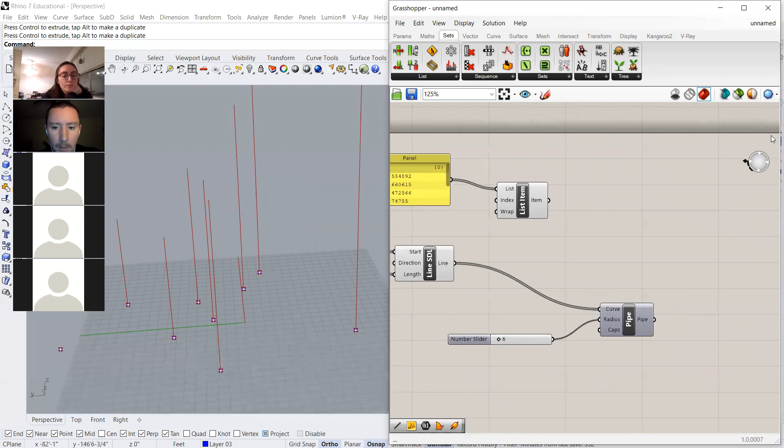So right now, I'm going to turn off. If I don't want to see the pipes for a second, or I don't want to see a preview, I can right click and turn off the preview.

So you can see, it's hard to see the point, but when I select this, I select all the lines. But when I select this, I only get one line because this line is at index 0, right? You can see underneath it says one locally defined value, 0. So automatically it's popping out whatever's at 0.

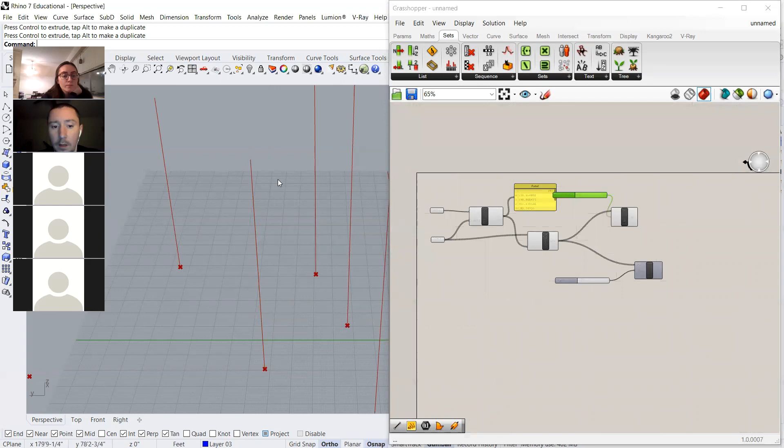I'm getting that number right there. If I created a slider here and wanted to pop this, to get the different ones, I need to plug in a different number at the index because I want a different index. So I want index 3, for example. Let me make this 7, okay, and I go to 3, I plug this into the index, and then I select on this one.

You'll see that I'm getting that line now. If I cycle through this, I get that line, I get that line back there. So I'm pulling all the different values out, right?

This is part of the reason why creating things matters. If I were to create these points, these are real points in Rhino. If I were to create those points in Grasshopper, I have a more predictable understanding of where they fall in that list based on how I create them.

I just created them kind of willy-nilly and selected them willy-nilly, so it's not as predictable as to where they are. As you go down your path, it would probably be better to create these points in Rhino or in Grasshopper, because when I create them in Grasshopper, I can say, okay, I want these points created this way, and I know where 0 is, and I can predict a little better where those numbers are.

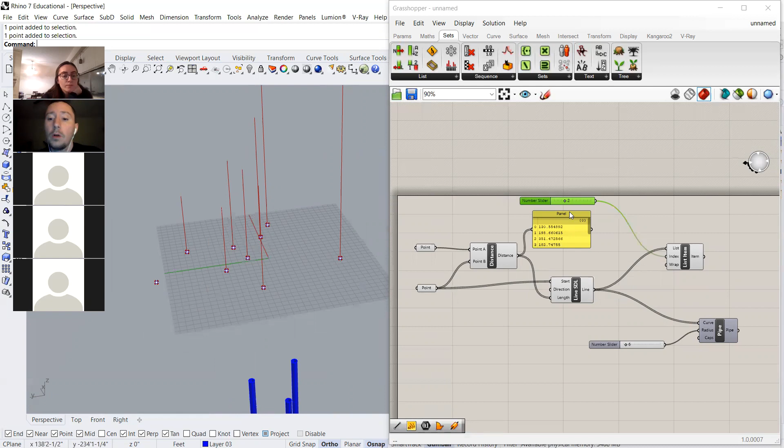But a quick way to find those - in this instance, they're all over the place. If you created a grid of them, then usually the first one, the bottom one, the one in the bottom left corner, is 0, and it goes 1, 2, 3, 4, 5 all the way over, and it kind of goes up that way. So in this instance, it's a little messy and probably not the best.

This isn't the cleanest definition on the planet, but that's kind of a first dive into lists. Lists can get super complicated - you can have a list 0 that has 10 things in it, so you'd see a 0 here, then 10 items, then a 1, then another 10 items, then a 2 and another 10 items. You're kind of getting lists and sublists and things like that. That's the easiest way to find it in this instance.

Any other questions at the outset? You excited to jump into Grasshopper? Well, I'll take your silence as just pure adulation of being able to finally jump in for a reason.

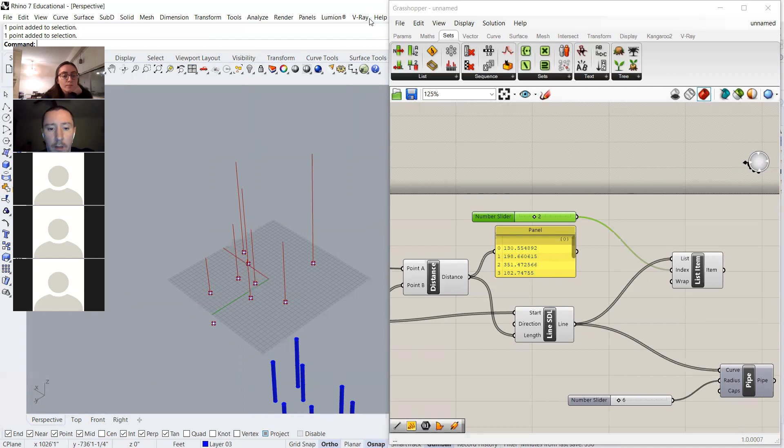Oh wait, let me see if there's chats. Yes, Earl - it requires 2 variables. What was that question regarding?

Why the cube command wasn't working - that was like way back when. Oh okay, sorry, I didn't see the chat pop up. Yeah, feel free to - during these lectures I just either don't notice it, or feel free to unmute, I usually will see somebody unmute and just interrupt.